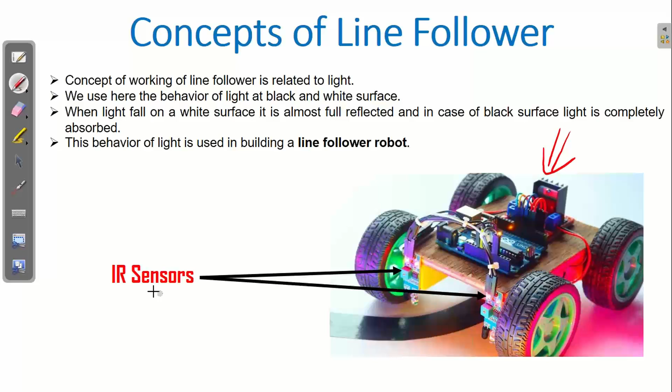So in this, the concept is that we have two sensors, as I've shown here. We have the IR sensor, which is connected here with the arrow you can see. These two sensors are actually the eyes of this robot, and based on this only, it is able to traverse the complete line. So if you look at the ground, you can see there is a black line going on here. Can you see that, guys?

And towards the end you will see there is a white surface this side, and here also we have the white surface. So basically this IR sensor is capable of sensing the black and white surface. Based on that black and white sensing, it gives input to the Arduino board, which you can see here. We will be writing some program in this Arduino board, and there we will take the decision, and based on that our motors will be running.

So you can see there are two motors present here. This is the wheel; actually the motor is present at this place. One motor will be connected with this one, another will be connected with this one. So basically it is completely the game of your sensors and motors, and in the middle there is your Arduino board along with one more device that I will show you later on. We have already discussed this earlier. That is called the motor driver, which helps to drive the motor.

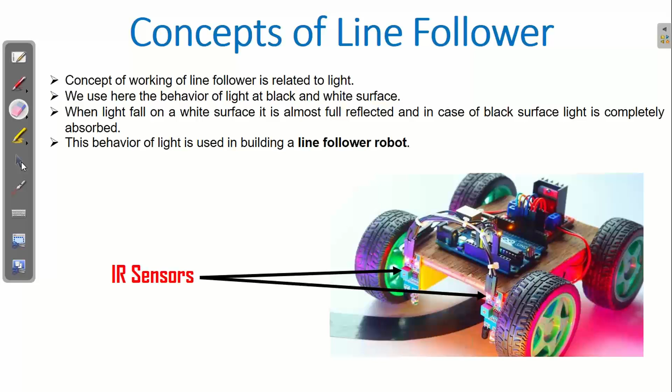So let's move forward and try to understand a little bit more in depth. Here I'm trying to make you understand the importance of the sensors. As I told you, it is completely the game of the sensors and motors. The sensors you are seeing here are called IR sensors. If you remember, I was showing you the black path and the white surface. So I've taken two diagrams here to make you understand how the sensors behave on a black surface and on a white surface.

So if you look carefully, here this is a black surface, and you all know that black surfaces are good absorbers. And this is your IR sensor present here. When you connect your VCC and ground, when you give this plus and minus to this IR sensor, the infrared light will keep on transmitting from the IR LED, like this. These rays will surely be falling on some surface.

So suppose this is your black surface present here. What will happen when these rays fall on this surface? They will get absorbed, as I've written here also. And if it is absorbed, that means the reflection will be minimum. Are you getting my point, guys? Whatever rays are falling on this are getting absorbed, so minimum reflection will take place.

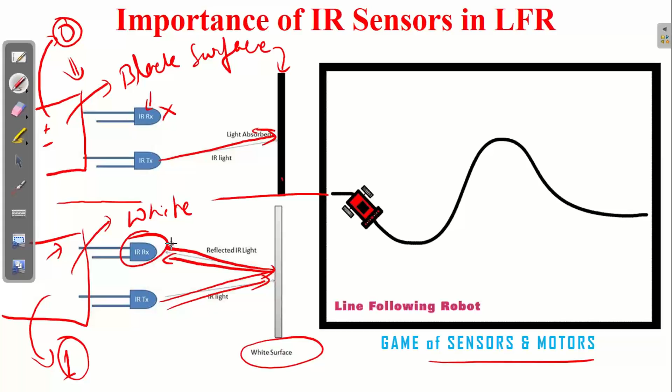Okay, now how will it happen? Actually, this sensor is a digital sensor. So if it is a black surface, it will generate the value 0. If it is a white surface, it is going to generate the value 1. And only this 1 and 0 will be fed to the Arduino board, and based on that we will be writing the program. Clear, guys? So if you change the surface, your value will change, and if the value changes, then accordingly your decision also will change.

Now let's come to this diagram. You can see I have drawn a very irregular kind of diagram. So what will happen when this robot moves forward? As you know, there are two sensors here. Let me try to draw the sensors so that you can understand. Suppose this is my sensor 1, this is my sensor 2. When this complete robot is moving forward, at this point of time, this sensor will come at this place and it's going to tell that I am on the black surface. Are you getting my point, guys?

So what I'm trying to say here is that when this complete robot moves throughout this surface, sometimes the left sensor will be on the black surface, sometimes the right sensor will be on the black surface, sometimes both of them will be on the white surface. And suppose if I'm putting a black strip here like this, then at the end when they reach here, both the sensors will be on the black surface.

So 4 different scenarios will be available. How many scenarios? 4 scenarios. We have to understand those 4 scenarios, which I'll be showing you just after this slide. Once you understand these 4 scenarios, you will be able to understand when to take a left turn, when to take a right turn, when to stop, when to move forward. So those things will be important.

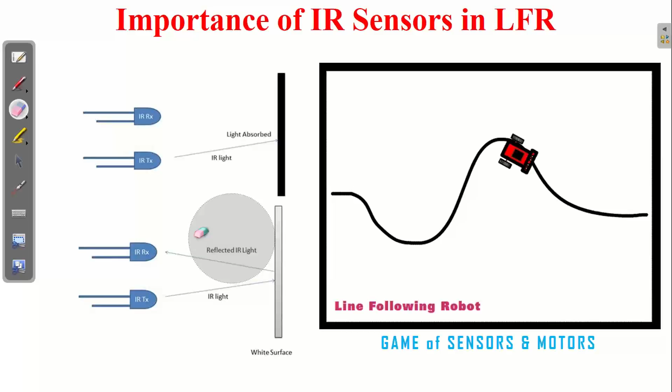So we have to write the code for these 4 scenarios only. In order to keep it very easy, I'm going to come up with the next part where you have to understand how the code will flow.

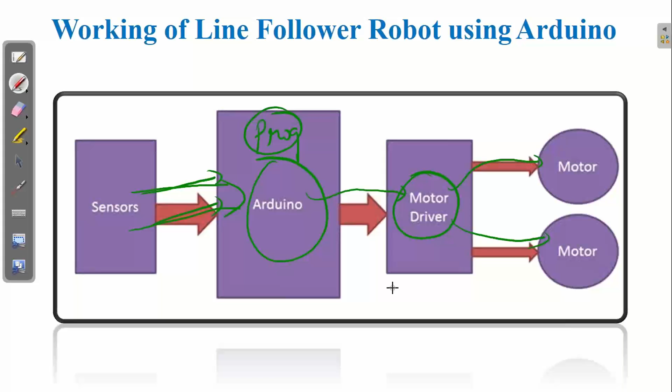So from the sensor, first of all, your data will be going to the Arduino board, as I just explained. And in the Arduino board, we will be writing the program which will be working according to the sensor's data. And we will also write a program which will be running this motor driver. And this motor driver will ultimately be running the motors. So this is the flow diagram using which your complete program will be running.

Okay, guys. So now let's check all four scenarios one by one. So this is, let's suppose, scenario one, which we have already discussed. If you look at this scenario, our left sensor as well as right sensor are both on the white surface. I hope you are able to see that. This is our black surface. Both the sensors are on the white surface. So in this case, we will always move forward.

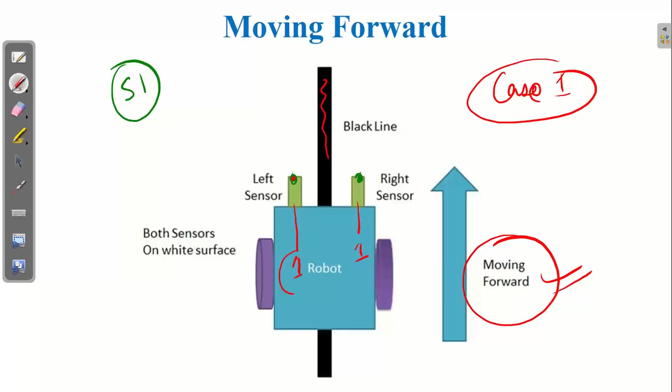Means we will take the sensor data, which is going to be 1. You all know, if the sensor is on the black, it is giving me 0. If it is on white, it is giving me 1. So when both the sensors are giving me 1, what should the motor driver do? It should help the motor to move forward. This is case 1. I hope this is clear to everyone.

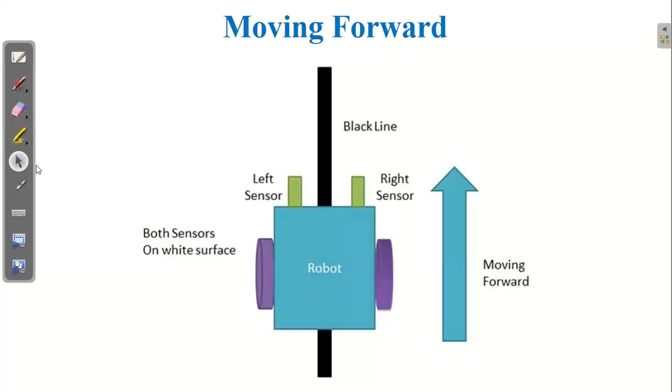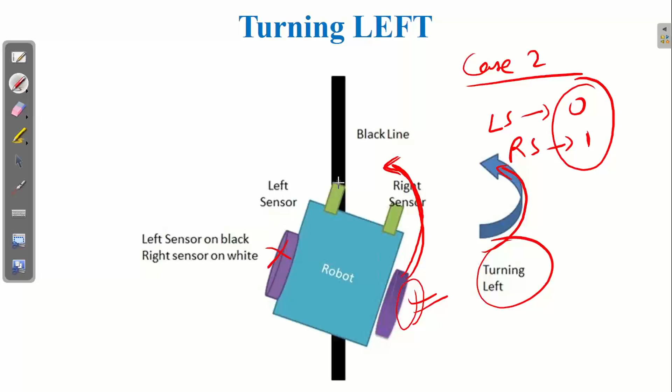Now if you want to turn left, can you see that, guys? We have to turn this wheel. If I turn this wheel, it will move in this direction. So we will stop this wheel and we will move this wheel. For moving forward, we will move both the wheels. For turning left, we will be moving the right side wheel, so that we can move in this direction. I hope this part is again clear to all of you.

Similarly, if you look at the third scenario, which is turning right, it is completely opposite of left turning. Here you can see your right sensor is on the black surface, left sensor is on the white surface. So if you look carefully, we'll have to take this turn. Only then our complete robot will be placed in this way, so that again I can move forward.

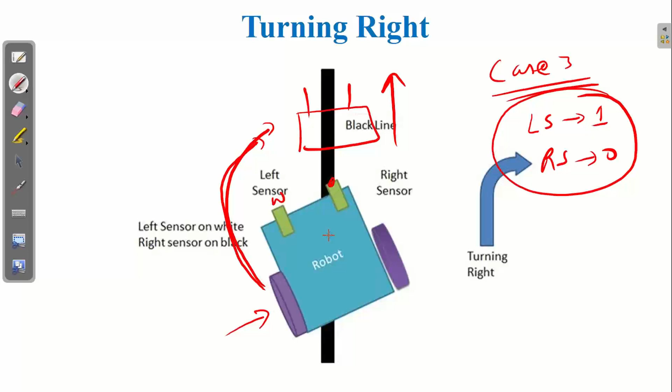So for this case, that is case number 3, what will we get? Our left sensor will sense and give me 1. Our right sensor will sense and give me 0. So if this scenario is coming in front of you, your Arduino board should turn the motor driver. It should turn the left wheel in this direction, so that the complete robot can again be moved in this way, so that complete forward movement can start. I hope this concept is also clear to all of you.

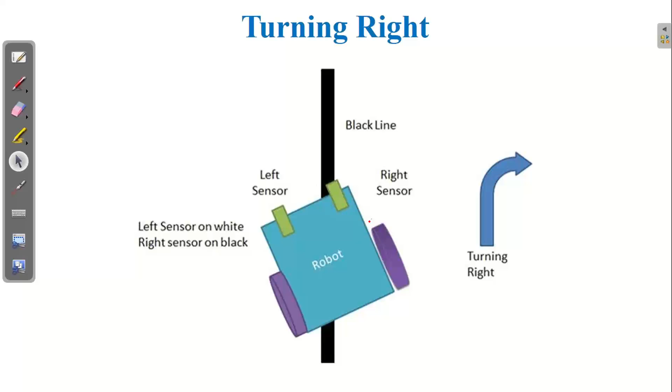Now let's move forward to the last case, that is case number 4. In case number 4, as I told you, both the sensors will be on the black surface.

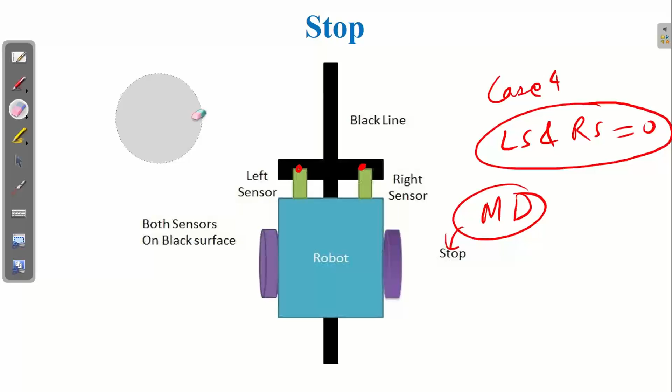So as both the sensors are on the black surface, what will happen in case 4? Your left sensor and right sensor both will give the value 0. So if I get this kind of scenario, in that case, the motor driver should stop. Now, how to stop the motor driver and all, don't worry, guys. We will teach you in the next part. I'll make you understand how we can do that also.

Okay, clear? So with this, I'm just moving forward and I'm trying to show you applications. And at the last, we will do the coding section. So if you look at the application part, can you see here this robot, guys? What is this robot doing? This robot is carrying the plate and is actually for serving some people in the restaurant.

So can you see that white line behind? Can you see that, guys? So it is actually working on the concept of line following. There are some modern restaurants where instead of people, it is served by the robots. What an interesting concept it is. Yes or no? Can you see this second case? Can you see that black line here?

So in order to pick up heavy loads, robots are made, and you just fill all the heavy loads and it can carry them forward. Now in this pandemic situation, you all know that doctors are not able to go to the patients because of the coronavirus problem. So you can see latest technology based robots are made, which follow the line, go to the patient and deliver the spray or medicine or whatever. You might have seen these things in news. They are using the concept of line following.

And if we make some modifications in the sensors, placing some sensors other than the IR sensor, then we can make a spray based robot which can move here and there and spray the liquid so that the area can be cleaned. Here also we can place an IR sensor, but the concept is a little bit different.

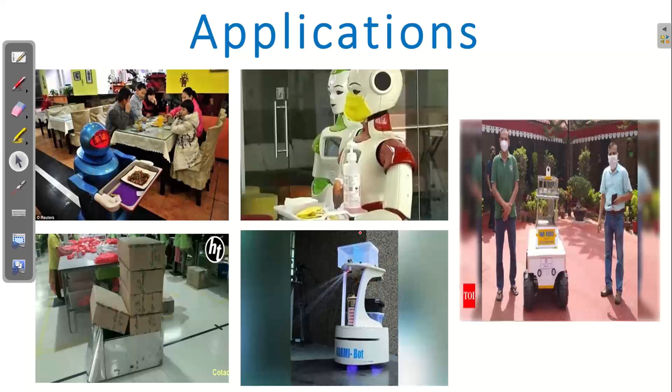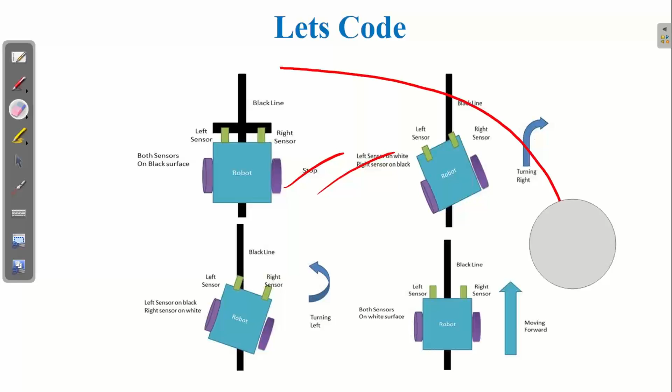So now it's time to code. In the coding section, we have to actually code for these 4 scenarios. Clear, guys? So I'll quickly move to the coding section and directly jump to that part. Have some patience and just wait a bit. In order to keep it easy, I'm opening the coding part in front of you, and I'm also opening the image.

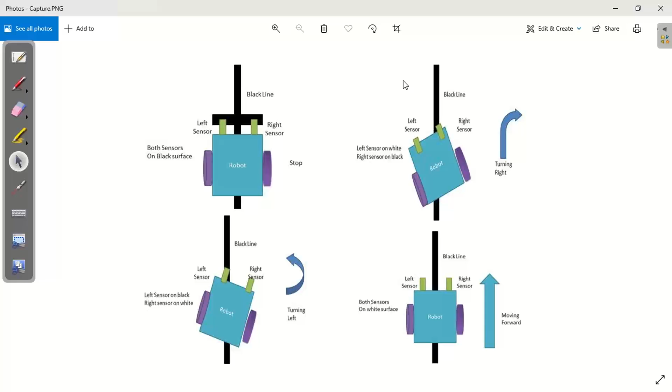So if you look at this image, this is what we have to code. I'm just making it small so that you can easily see the coding part as well as the image part. So just confirm, guys, whether you are able to see the image part and the coding part together. Just write yes in the chat box if you're able to see them.

Yeah, great. So if you look at the code, you may feel that it is a little bit bigger, but don't worry, the code is not bigger. Once you understand one part, you will understand everything. Before proceeding forward, let me quickly show you the hardware part, so that when I come back here and explain, you are in a position to understand. Otherwise, you may have some confusion, guys.

So what I'm going to do now is close my screen, and I request Preetham to share his screen, and let's see all the hardware parts first. Okay, guys.

Preetham, can you just share your screen so that we can show our students all the hardware parts? Okay, guys. So you can see this is called chassis. Chassis means the robot main body part. So on this body part only, the complete robot will be set up. So let's see how it is getting set up. We'll see first of all the components.

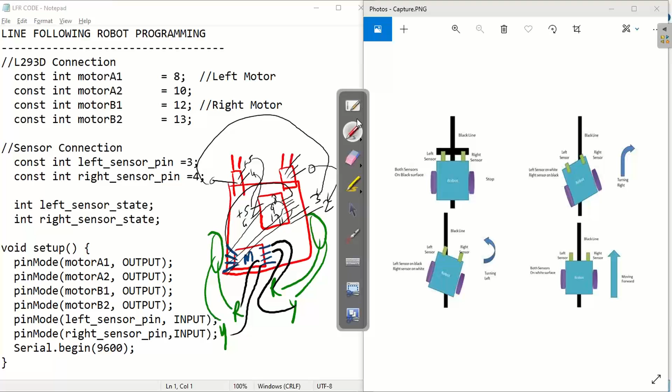Though the diagram may be a little bit clumsy, I hope I gave you a complete overview of whatever Preetham sir has done. So let's now proceed forward and see how we can complete. As I told you, we can take any pin. You can see here, I have taken 8, 10, 12, and 13. You can take any. I have taken 4 variables and marked them constant so that no one should be able to change them. That's why, nothing else. I'm taking integer type variables.

I'm naming them motor A1, motor A2 because motor A has 2 wires. Similarly, motor B1, B2. So I've taken 4 variables here. Similarly, I have taken 2 sensors also. Pin number 3 and pin number 4 I am connecting to sensors. So guys, it's important for you to remember, so I'll just write here. Motor A is connected to pin number 8 and pin number 10.

Motor B is connected to what? Can you repeat, guys? Pin number 12 and 13. Then we have 2 sensors. Let's suppose sensor 1 and sensor 2, they are connected to pin number 3 and 4 respectively. So I hope now you have understood where your sensors are connected and where your motors are connected.

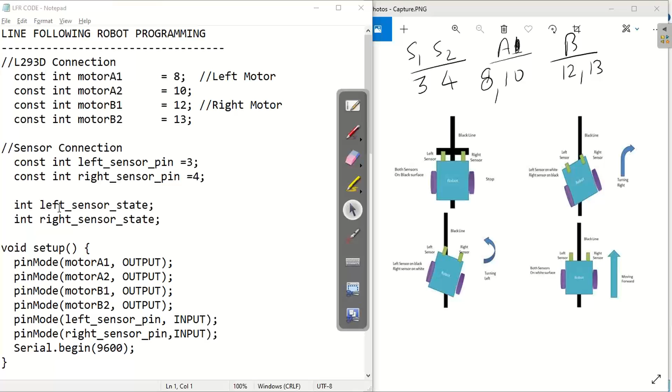Accordingly, I have taken 2 more variables which will keep the state of the sensor. If the sensor is sensing, it will keep high. If the sensor is not sensing, it will keep 0. For those 2 states, I have declared left sensor state and right sensor state, both of integer type so that I can store 0 and 1 there. Now coming to the void setup part, you know that the Arduino program has void setup and void loop, yes or no?

So in the void setup, what we are doing, we are just activating all the sensors, all the outputs, all the channels. You know that in the Arduino board, in total we have taken 4 pins for connecting our motors and 2 pins for connecting the sensors. So you know that the motor is the output device, so the channel should be marked as an output channel. Yes or no? And sensors are input devices, so the channel should be marked here as an input channel.

So for that, you can see I have written the respective code. The command pinMode helps us to decide the mode of the channel. So motor A1, motor A2, motor B1, motor B2 are actually what? Output devices. So I am marking their type as output channel. So if you write here OUTPUT, what will happen? All the 4 channels, that is motor A1, motor A2, B1, B2, I mean pins 8, 10, 12, and 13, those 4 pins will be marked as output channel based pins.

Okay. And if you look carefully, the next 2 pins are marked as what? Input type. Can you see that, guys? And that is pin number 3 and 4. So pin number 3 and 4 will be ready to accept the digital inputs, whereas pin number 8, 10, 12, and 13 will be ready to give digital outputs.

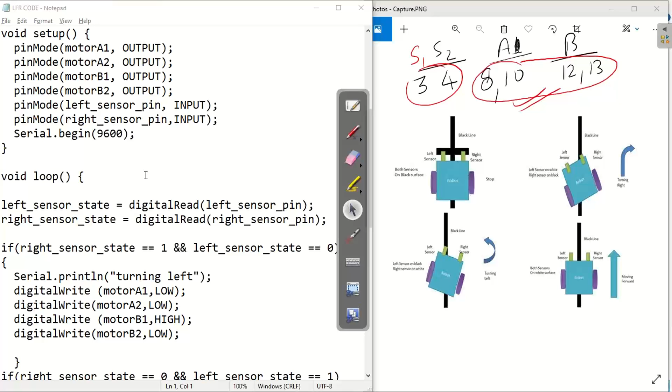Now, once you have done that much, let's move to the void loop and try to understand what is going on here. The first thing we should do is take the input from the sensor, because unless you take the input, you cannot process it. Yes or no? So the first 2 lines you are seeing here, left sensor state and right sensor state, are 2 variables which are ready to take the state of the sensors. That can be either high state or low state, I mean, either 1 or 0.

So for that, we will use the function digitalRead. digitalRead is a function which helps you to read from the respective channels. So if the sensor is sensing high, with the help of digitalRead, I will be able to get that high signal and I can store it in the left sensor state. Similarly, I can store it in the right sensor state.

And let me tell you guys, this is going to be real-time data. When the robot is moving on the surface, whatever changes occur, based on that the value of left sensor state and right sensor state will keep on changing. Clear? Getting my point, guys? When the robot moves forward, the left sensor data and the right sensor data will keep on changing. Clear? Now, once we have got the input, it's time to understand all the four conditions.

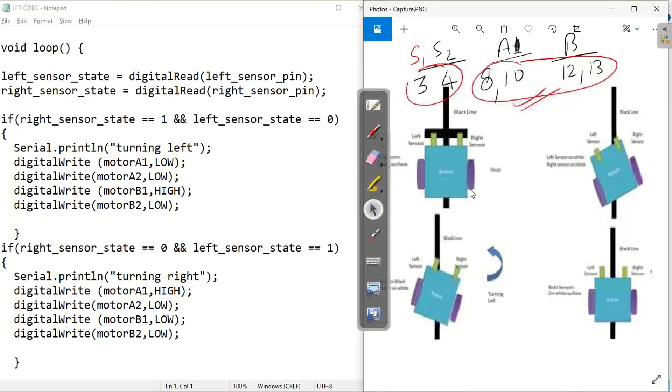So I'll just try to zoom and show you. First of all, we are going to move forward. If you look carefully, this is the forward case. I hope it's visible to you. In this forward case, you know that both the sensors are sensing, so our condition will be that both sensors are giving me 1 1. Out of the four cases, I am going to describe them one by one. So this is the case where both sensors are sensing. Can you see that, guys?

In the if condition, I have written here that the left sensor state is 1 and the right is 1; both should be 1. That's why I've written the AND operator, to check that if both sensors are sensing, then I have to do this task. So what I'm doing here is moving forward. In the serial monitor, you will see the message going forward. Whenever both your sensors are on the white surface, you will see the message going forward in the serial monitor. Why? Because this condition has become true.

Okay, now to move forward, you know that both the wheels should move. So for that, if you remember, when I was teaching you H-bridge, I explained to you about the motor driver, and there we came to know that if you want to move a wheel, one should be high and the other should be low. So similarly, as I have to move both the wheels, I'll take the help of the digitalWrite command and I will pass A2 of the motor, the first wire, as high and A1 as low, so that the wheel keeps on rotating.

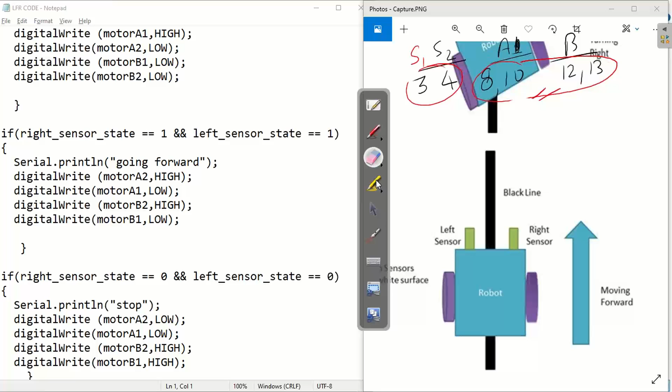So can I get a yes in the chat box if you have understood the movement logic of moving forward? Is it clear to you guys? You can write yes in the chat box if you have understood. Or if you have not understood any part, you can ask me, guys. Is it clear? Yeah, correct. Okay, fine. So I hope Roshan you are getting it, and I hope others are also getting it. Clear. So now let's proceed, guys.

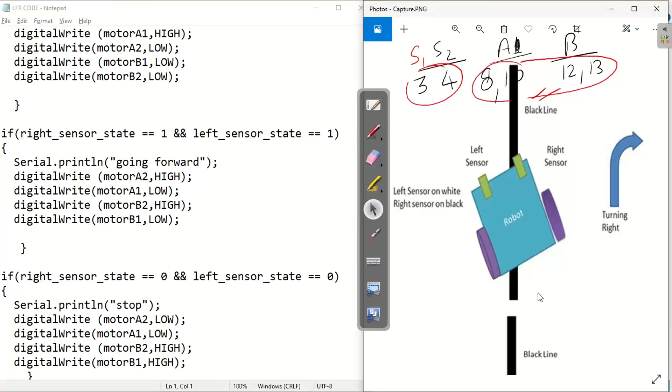So we have seen our moving forward case. Now I'll move to the turning right part. If you look at this turning right section, you can see one of the wheels should move. So if you look carefully, in that case, one of the sensors is sensing and the other is not sensing. Can you see that? Okay. So if you look carefully, in our case, our left sensor is sensing and our right sensor is not sensing. Why is it not sensing? Because it's on a black surface.

So you can see which scenario will be correct. Our left sensor is sensing, so here it is 1. Right sensor is not sensing, so it is 0 here. So if this scenario is correct, then this part of the code will be executed. In this, you want only one wheel to rotate and the other wheel should not rotate. So if you observe carefully, only motor A is rotating and motor B is not rotating. Can you see that, guys?

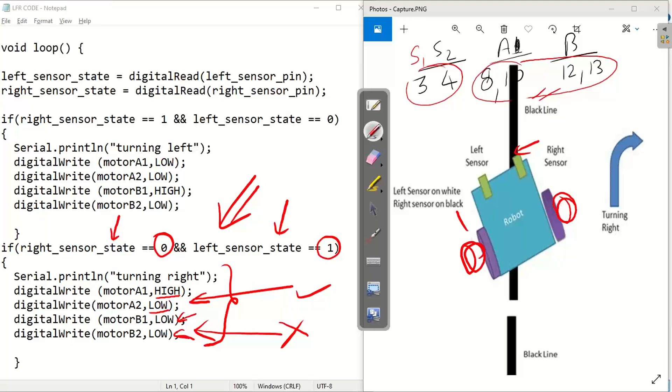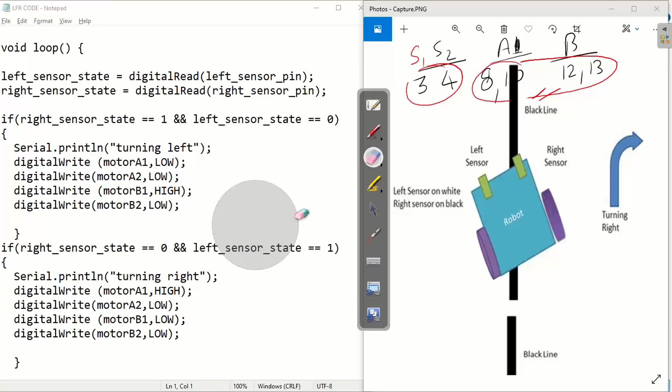How did I come to know? You can see one of the wires is marked as high, the other is marked as low. So this is rotating, and here both of them are marked as low. If both of them are marked as low, or both are marked as high, it will not rotate. So in this case, this wheel will be rotating, your turn will take place, you will have a position like this, and your robot will start moving forward. Getting my point, guys? So I hope this is clear to everyone, and now it's just to check the other two cases.

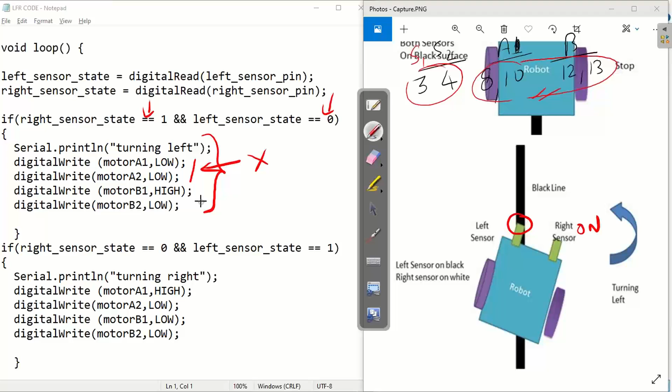So if you look at the turning left case, it is again the similar kind. The only difference is you will look at the sensor. Here left sensor is off and right sensor is on. So similarly, you can see our left sensor is off here, right sensor is on, and in that case, this logic will be implemented, where you can see our first wheel is not moving and our second wheel is moving because it is having high and low, whereas first wheel is having both low.

Clear, guys? So in this case, this wheel will rotate, and when this wheel will rotate, it will turn in this direction, okay, and it will lead you in this way, so that you can keep on moving forward. Clear, guys? I hope it's clear to all of you. Okay, now only one case is left.

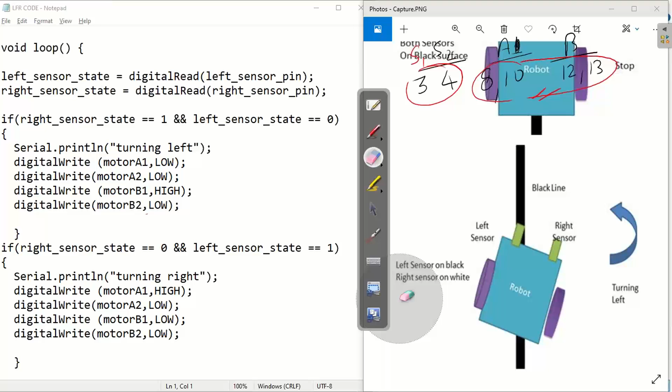Let's see that also. So that's the case where both the sensors are not sensing, and in that case, what will happen? The only scenario possible here is that the left sensor and right sensor both will be giving me 0 0, and in that case your robot should stop and both your motors should also stop, because ultimately only when your motors stop does your robot stop.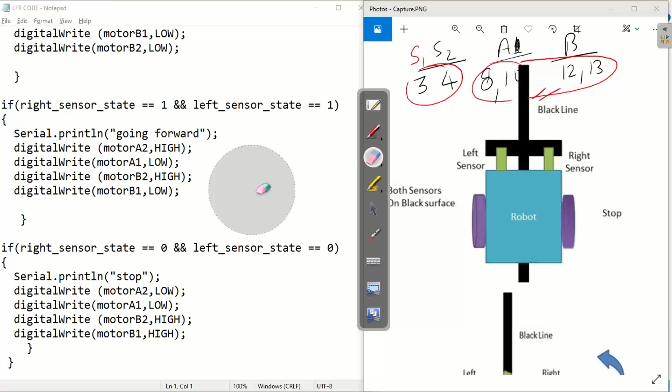Yes or no? So you can see I have marked them both as low, and here I have marked them both as high. So if the polarity is same, the motor will not run. That is the logic. So here in this case, the motor will not run, and by this we are completing the basic logic section.

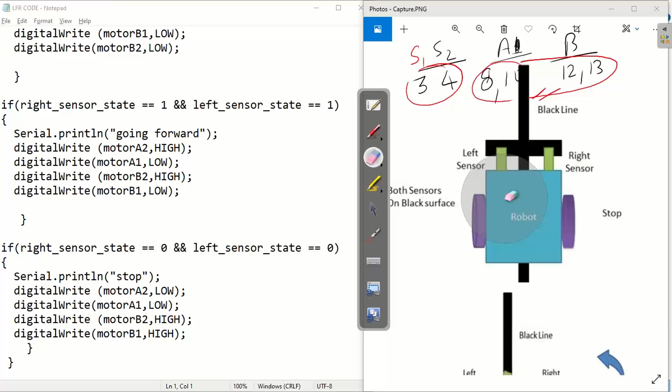I hope you have understood. If there is any query, you can put in the chat box. If there is no query, then let's move to the practical session. We will show you practically how that robot is moving following the path. Okay, let's try to do that, guys. So I'm just stopping my screen. I'm requesting Preetham to switch on his screen and show us the practical part. So this same program will be dumped there, guys, and they will show you.

So Preetham, is the setup ready? Then we can show to our students. I think there is some issue. Okay, fine. So Preetham has switched on his.